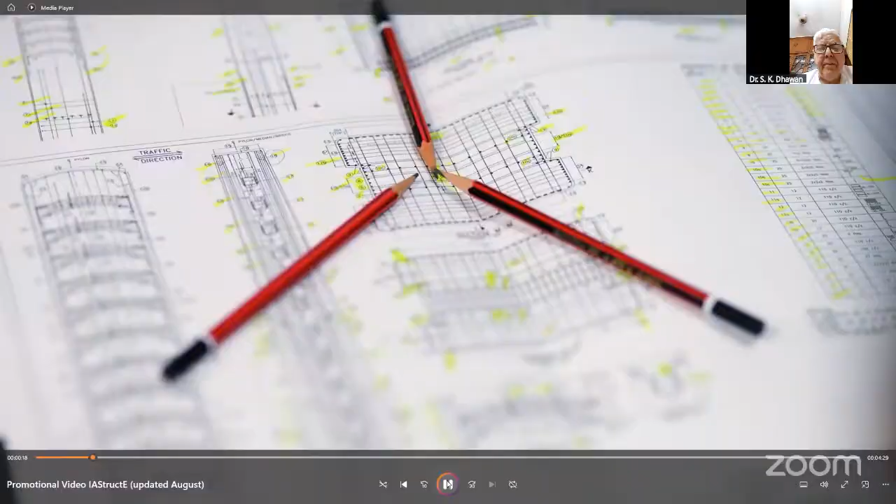The Indian Association of Structural Engineers, also known as IAStructE, was conceptualized and constituted in the year 2002 by a group of senior professional structural engineers from all over the country. IAStructE is registered under the Societies Registration Act 21 of 1860.

IAStructE is a national apex body of structural engineers in India with a mission to promote the structural engineering profession and cater to the professional needs of the structural fraternity. In the short span of 2 decades, the association has attained an eminent position in the professional field. Its membership is valued very highly in the profession.

Since inception, IAStructE has been led by eminent structural engineers like late Shri Mahendra Raj, late Shri Kumar Ghosh, Shri Subhash Chand Mehrotra, Professor Mahesh Tandon, Shri Alok Bhowmick, Shri Manoj Mittal and Professor R. Pradeep Kumar as its president.

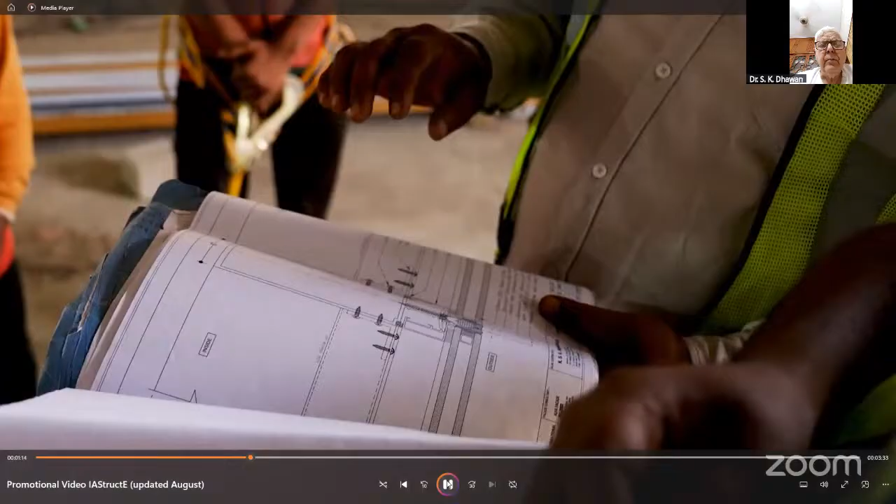IAStructE is a permanent member of Engineering Council of India and interacts with the government on professional and policy matters related to civil and structural engineers. To expand its reach, IAStructE has collaboration with various international like-minded professional associations and institutions.

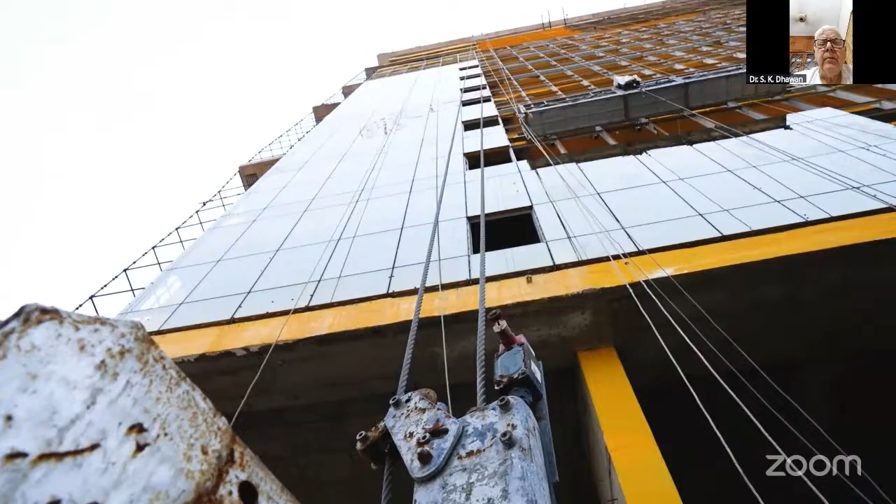IAStructE's prime objective is supporting and protecting the profession of structural engineering by upholding professional standards and acting as a mouthpiece for structural engineers in India. IAStructE endeavors to ensure that its members develop the necessary skill in structural engineering and work to the highest standards by maintaining a commitment to professional ethics and standards.

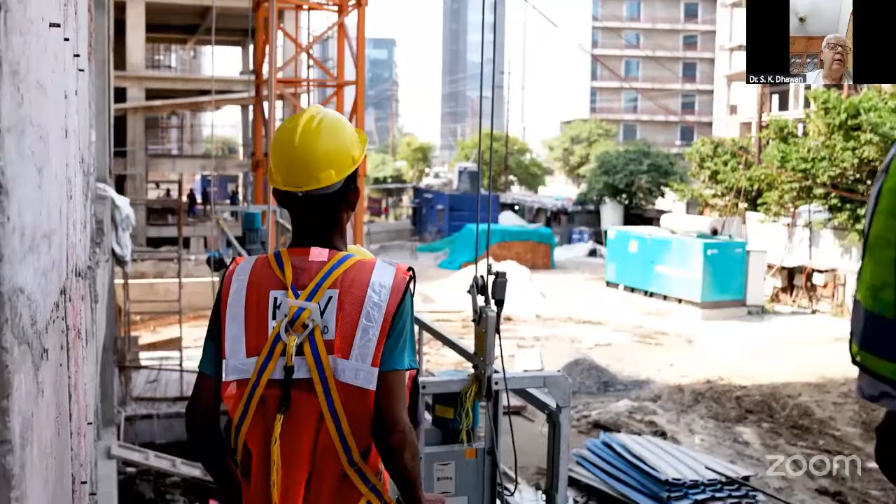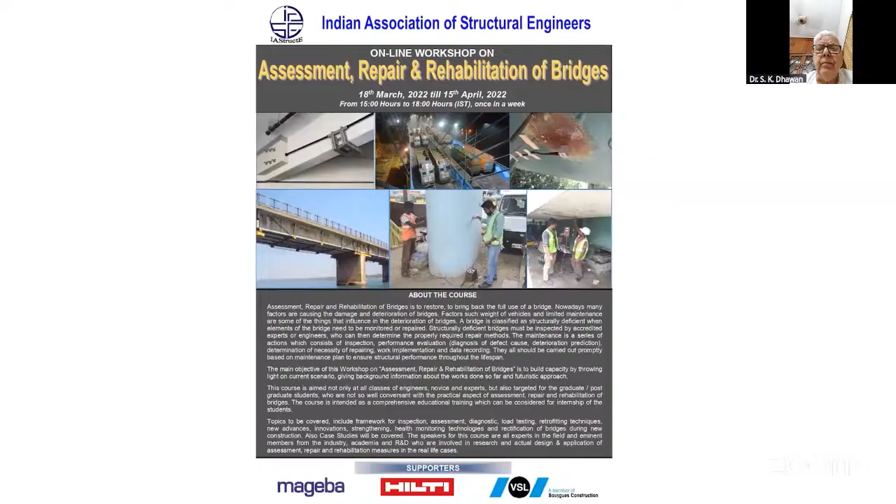IAStructE is actively engaged in organizing several continuing professional development (CPD) courses for structural engineers to help them update their knowledge and advance their career paths. It also conducts refresher courses for young and practicing engineers and student-oriented programs. Seminars, workshops, conferences, technical lectures and discussions related to the latest technological advancements, and case studies are also organized regularly for members to enable them to continuously update their knowledge and skill set by interacting with the best minds from the industry. IAStructE's activities are widely appreciated and known for quality technical contents.

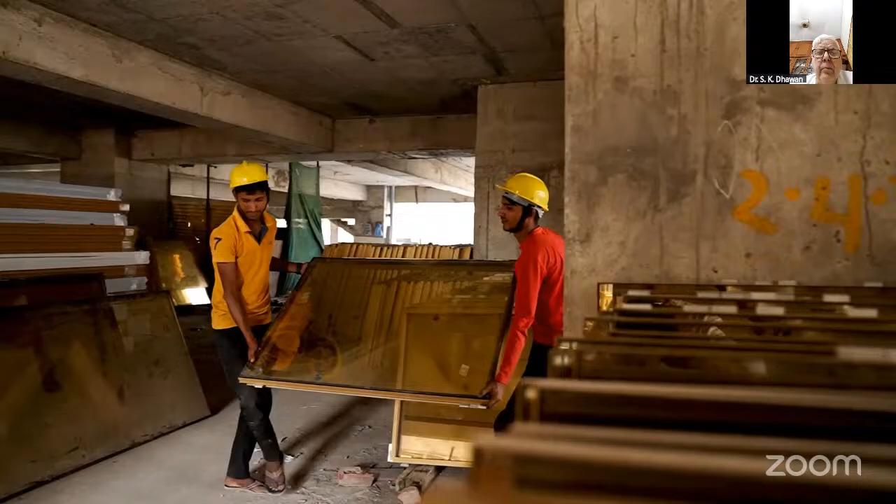IAStructE is also actively engaged in publishing its quarterly journal Structural Engineering Digest (SED), code commentaries, professional guidelines, and a monthly newsletter. IAStructE's publications are becoming popular with time. IAStructE has representation in various technical committees of BIS and IRC as well. Its members are actively contributing to national code formulations.

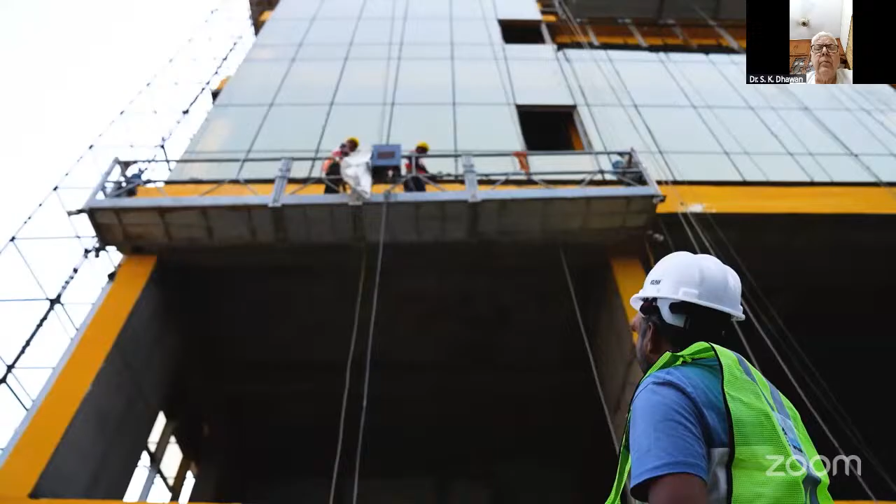In the year 2020, IAStructE started the National Awards competition to stimulate interest in the structural engineering field and to promote innovative thinking and creativity. The awards are presented to the winners in recognition of their outstanding contribution to structural engineering in the categories which include Outstanding Structure, Outstanding Structural Engineer, Outstanding Woman Structural Engineer, Promising Young Structural Engineer, and Best Master's Thesis in Structural Engineering.

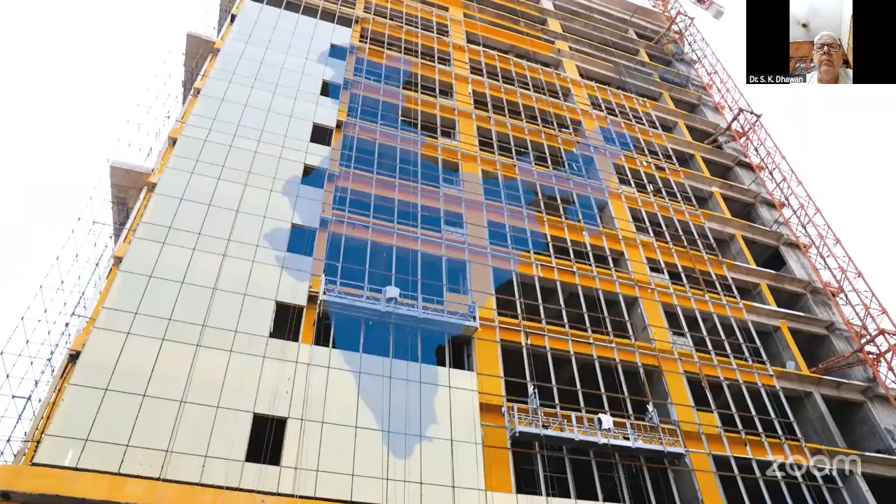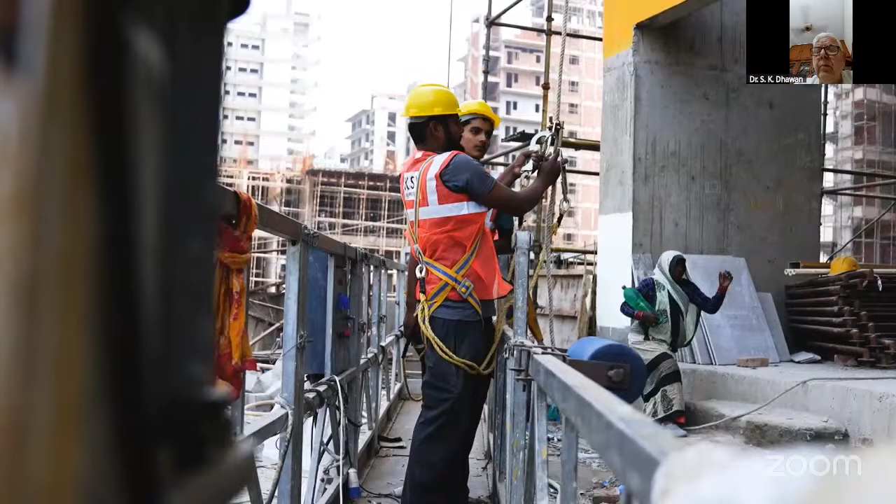IAStructE is currently operating from 4 regional centers, namely Eastern, Western, Northern, and Southern, having its headquarters in Delhi, to inculcate the professional culture and provide handholding to the budding engineers. IAStructE has its student chapters in several leading engineering institutions as well.

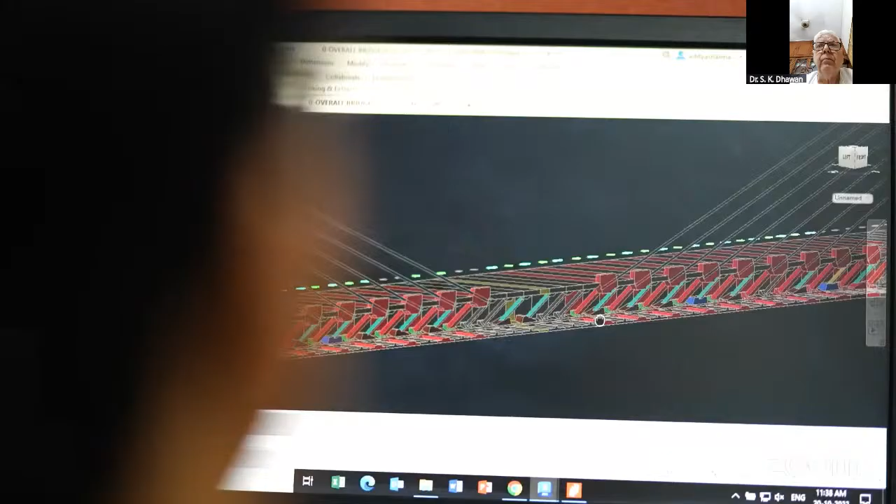Membership of IAStructE is open to all civil and structural engineers engaged in the structural engineering profession. Members are elected based on their qualifications and experience in different grades as per eligibility requirements prescribed in the bylaws. Each application is carefully scrutinized before electing the members.

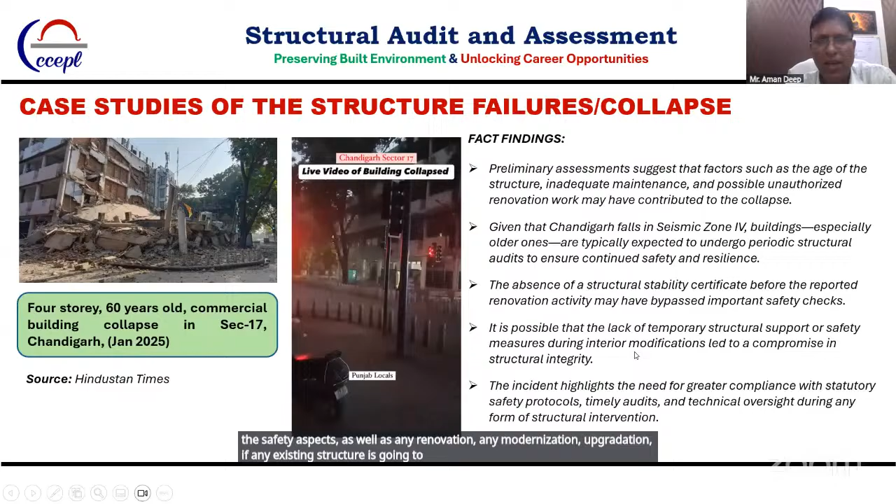So this incident highlights the need for greater compliance with statutory safety protocols, timely audits, and involvement of technical people who should be able to guide the safety aspects of any renovation, modernization, or upgradation. Any existing structure should be dealt with proper technical background. Another slide shows us the issues of neglect, or I would say technical neglect or technical incompetencies.

A 6-story building in Surat collapsed following heavy rains. 7 people killed and more than 15 injured. Similarly, another 18-story residential tower slab from 6th floor to 1st floor pancaked down, killing 2 residents in Gurgaon.

So many of such kind of news we are seeing for last many years. And the probable reason of this kind of collapse could be the corrosion of the reinforcement of the building, especially if I see the buildings which are having basements and stilts. Those areas are generally neglected for structural safety, and deterioration distresses start at the base level.

And from the base level, if the column reinforcement goes down, or maybe the concrete gets deteriorated, cracks, the structural capacity reduces a lot, and the earthquakes make them vulnerable for larger damages. So routine checks and audits were not there for these buildings, and unauthorized renovations carried out in lower floors. Cracks and water seepages had been reported earlier, but people ignored. Builder and RWA did not take any appropriate action.

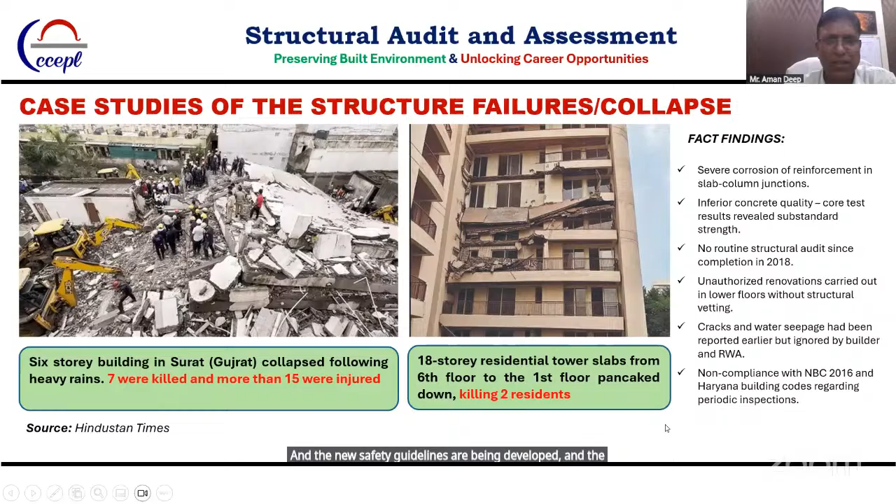So the key observation, what I find, is the aging infrastructure for these kind of accidents or deteriorations. Many accidents involve structures over 30 years old, highlighting the need of regular maintenance and audits. There are many unauthorized constructions which are non-engineered designs, constructed without any engineering involvement and not maintained. So those buildings are at severe risk.

The buildings what we sometimes call the general builder floors, they hardly involve technical people, and more focus is on the commercial gains. So for them, they say this is just a business, but for us, it is a profession. And as a profession, we have to see the building should be safe and should survive for its service life, the design service life. Now, what should be the design service life of a building?

Our general assumption is that for a very severe earthquake handling, we consider 50 years as a safe design life of a building. But if we see the infrastructure projects like metro railway stations and other important buildings, probably we want them to live more than 100 years. So for different types of building, we may have

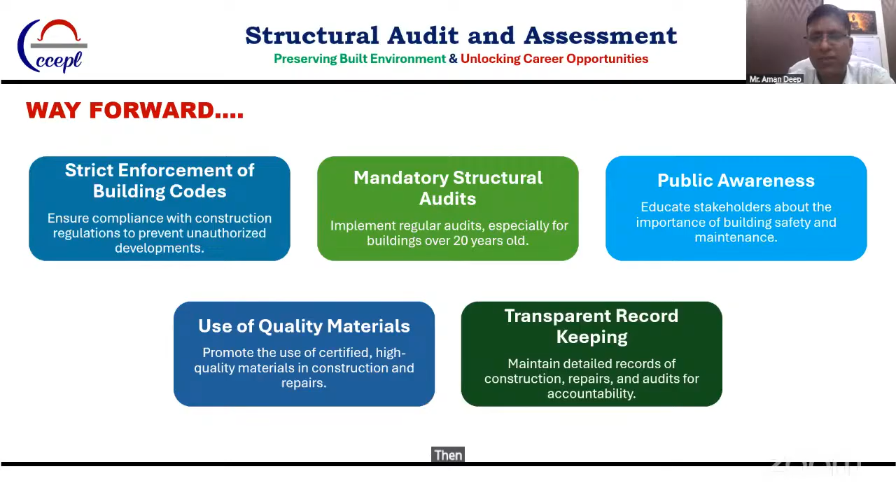errors also. And if, during our quality checks and quality control testing systems, we are able to get some information about errors or something which requires improvement, and if we are able to take corrective action and all required preventive actions, then our constructed built environment is going to be very good for the future.

So coming to the advantages or benefits of structural audits. Why are audits critical to the built environment? First of all, they give safety to the occupants. They prevent sudden failure or collapse. As in the initial slide I showed, some balconies collapsing, some handrails collapsing. These are the general news we see almost every week or so.

So if we conduct structural audits regularly, are concerned about the safety of the occupants, deal with the buildings with proper care, and are able to provide repairs and rehabilitation systems to the building properly, then the first advantage we get is the safety of the occupants. It will avoid any fatalities or injuries, and it ensures compliance with safety regulations.

Now, in some cases, the building's use type or loading type needs to be changed. Sometimes a residential building becomes a commercial building, or a commercial building becomes a storage area, so the load has increased. Sometimes a factory becomes a showroom, or a showroom becomes a factory. Sometimes a normal building becomes a library with a load of books, or some warehouses are created within the building.

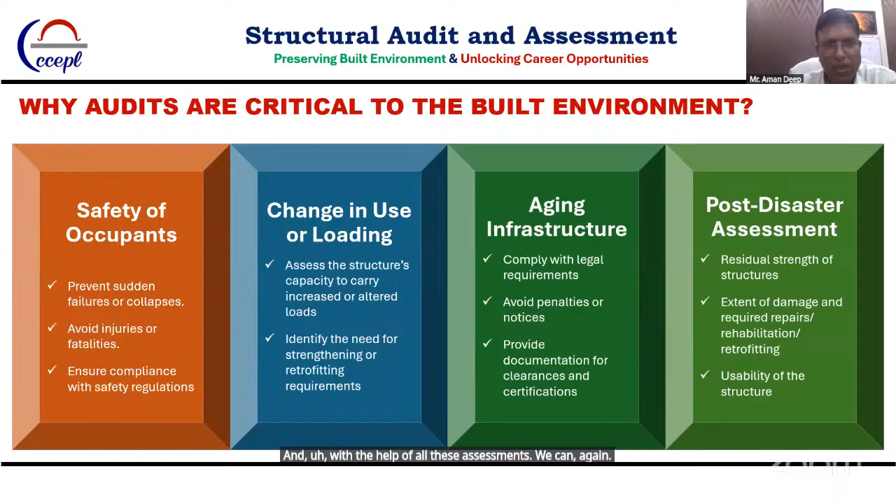And if some damages have happened, what is the need for strengthening or retrofitting those elements? With the help of all these assessments, we can make that building safe and habitable again, and it can have sufficient residual capacity to withstand another disaster.

Another advantage we get from structural audits is cost-effective maintenance. If we have timely audits every 3 to 5 years, we would know the requirement at that time, and with a small cost of repair, we can maintain the building on time. If we ignore the audits and safety repairs, after a long time the deterioration will be very high, and retrofitting or rehabilitating it could be very, very costly. So with regular audits, we can save a lot of cost during the building's service life.

Again, now coming to the advantage: regulatory compliance. As per our National Building Code of India, each and every building should have structural safety, fire safety, and electrical safety audits every 3 to 5 years. Different regulatory bodies define the structural audit requirements because it's a state matter. Ultimately, either the municipal corporation or authorities will define the period of audit and the compliances.

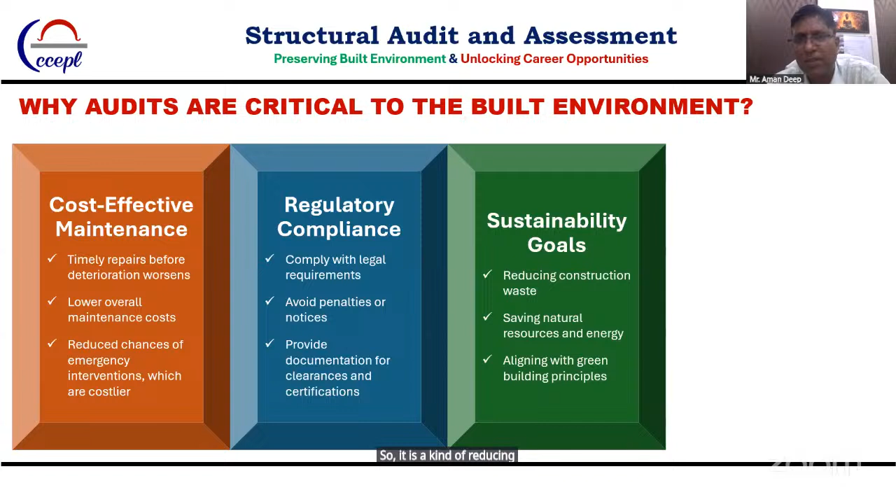And then sustainability goals. Now, if your building is going to live long, it is a sustainable aspect because constructing a new building consumes a lot of energy and causes CO2 emission. All building construction elements are consuming more and more carbon dioxide emission materials and energy. So if we are able to make our building life longer, it is helping us in our sustainability goals. It is reducing construction waste, saving natural resources and energy, aligning with the green building principles.

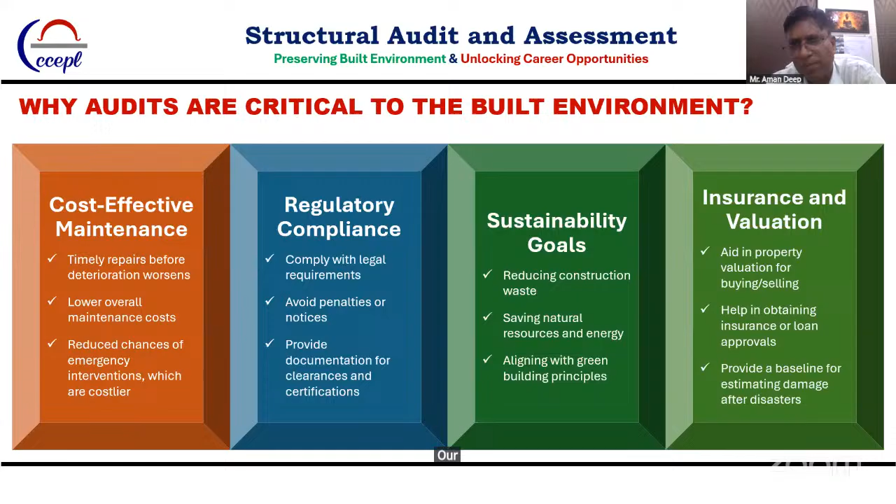And further, you get advantages for insurance and valuation. Though in our country at this moment our insurance premiums are constant, it is likely that in time to come, buildings which are constructed well and maintained well may have lesser premiums than buildings which are not maintained properly. So if we have regular technical audits, structural audits, safety audits, and we are complying with the safety requirements, our building insurance benefits and valuation benefits will be higher.

Until now we discussed the benefits of the structural audit. And now briefly, I will discuss how audits work, tools to tackle the hidden challenges, and the steps involved in structural safety audits. The first step is document review and critical visual inspection of the structure. Document review means the construction documents: as-built drawings, a geotechnical report if available, or documentation of any repairs, strengthening work, or interventions the building has undergone in the past. With critical visual inspection, we try to assess the condition of the building.

For things which are not visually auditable, we do non-destructive tests. There are many types of non-destructive tests which are helpful in assessing the building. There is a guideline document of IAStructE, available on their website. It is a small document giving a brief description of how to audit a building and what kind of non-destructive tests we require for the audit system. So you can get details from their document. At this moment, I'm just giving you the brief idea of the requirement.

What we sometimes find in the market is that some people only do visual inspection, and based on that, they provide a certification report that visually everything is fine, so the building is fine. So it is a very raw assessment if we declare based on visual inspection.

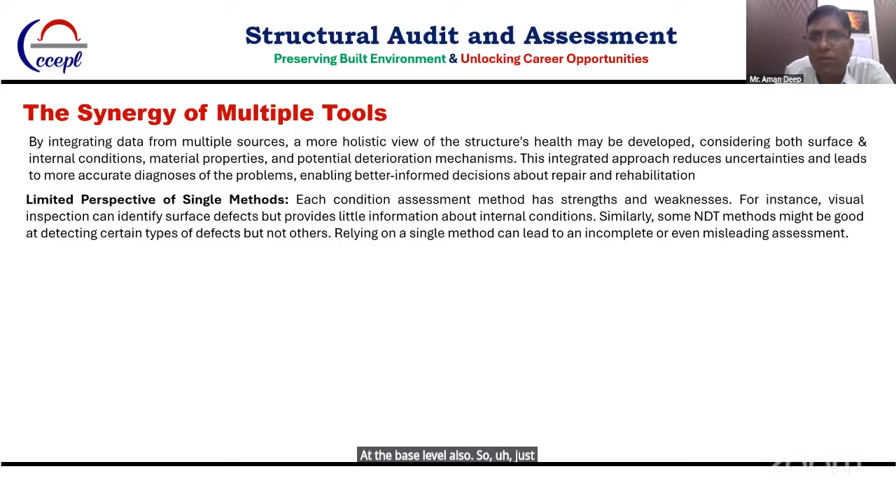Generally, it should be supported with a little more information about the internal conditions with the help of non-destructive tests or maybe some partially destructive tests. Sometimes we have to dig for the foundation sizing also, and sometimes we have to assess the condition of the concrete and reinforcement at the base level also. So just based on visual inspection, we should not certify any building to be safe.

Yes, of course, visual inspection is required to have an initial assessment, and then other tools like non-destructive and laboratory tests help for the complete condition assessment of the structure. So with this integrated approach, we take up the complete audit and assessment.

And I'm happy to tell that at BIS level, at the Bureau of Indian Standards, we are developing a standard for the engineers, for the structural engineering consultants, on how to take up the structural audit as a consultancy. The standard is at its advanced stage. Almost everything has been discussed. The document content is being finalized, and probably within this year, the Indian standard on structural audit would be available for all.

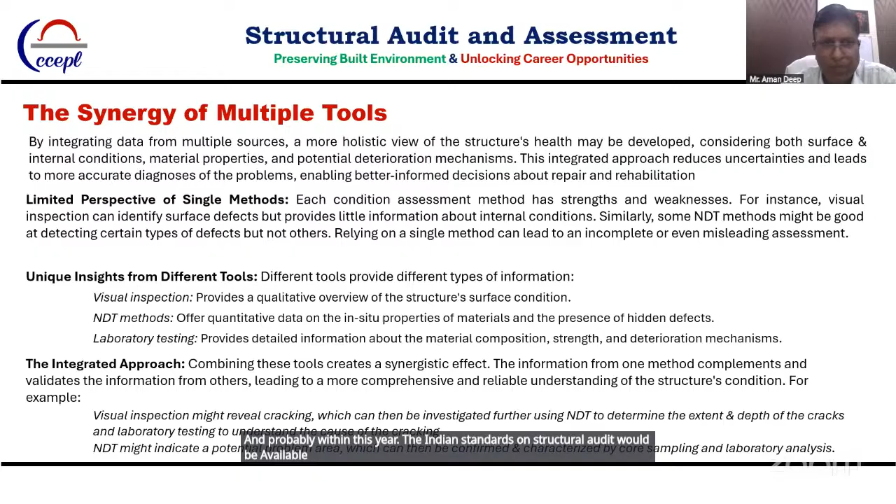So based on the current level of working at BIS and my own assessment, and as per our past experiences with the audit process of structures, we find there are different stages, generally 5 stages we consider of audit. The audit stages are mainly 2, but for the complete 360-degree completion of the audit process, I consider 5 stages.

First stage is the visual inspection by a competent structural auditor. Second stage is the non-destructive testing, maybe partially destructive testing also covered within this. And based on that, finalization of the audit report, which we consider to be a kind of condition assessment audit report. Now, if we have assessed the condition, if the condition is good, that is fine.

If the condition is not good, we go to stage 3, in which we require some strengthening intervention design. And all these designs will be taken up by a competent structural engineer, and it has to be vetted by the structural auditor who has the complete analysis of the condition assessment findings.

Stage 4 is the implementation of stage 3 by a competent execution agency. Now, in our country, there are many good execution agencies who have trained and developed themselves to work on the retrofitting, rehabilitation, and repairs of existing buildings.

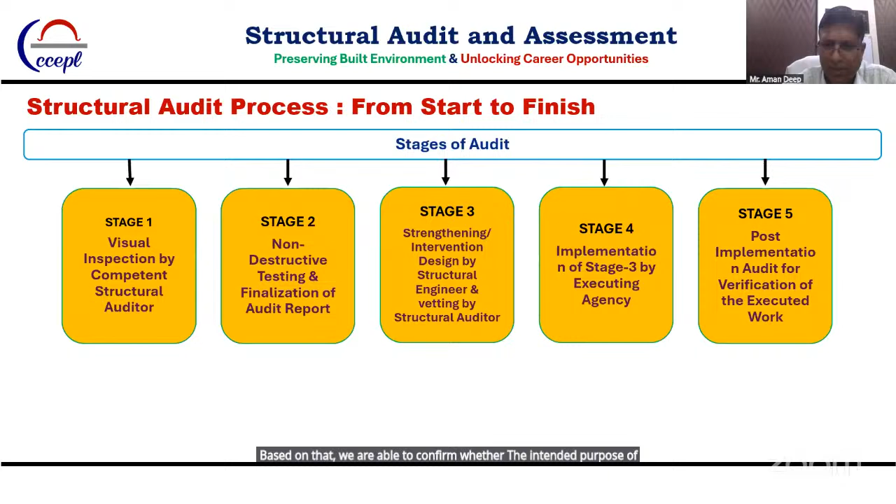Coming to the next slide, I would like to show you the basic framework of this Indian standard, which is under progress. I take the liberty to share the flow chart, which is in almost final stages. This flow chart shows how the structural audit process would take place from start to finish. Now, in this, we have defined 2 stages.

First stage is about the condition assessment, in which the aim and objective of the audit and the scope of work are to be defined. Then the owner will appoint a structural auditor. The structural auditor would carry out visual inspection of the structure, and based on the visual inspection, sometimes the auditor may do some basic non-destructive tests also at this stage, and then prepare and submit the visual inspection report.

If the aims and objective of the structural audit report is fulfilled, then this audit is considered to be completed. But if the building has some deteriorations and the building safety audit does not suggest it to be a safe building or structure, then we have to move to stage 2.

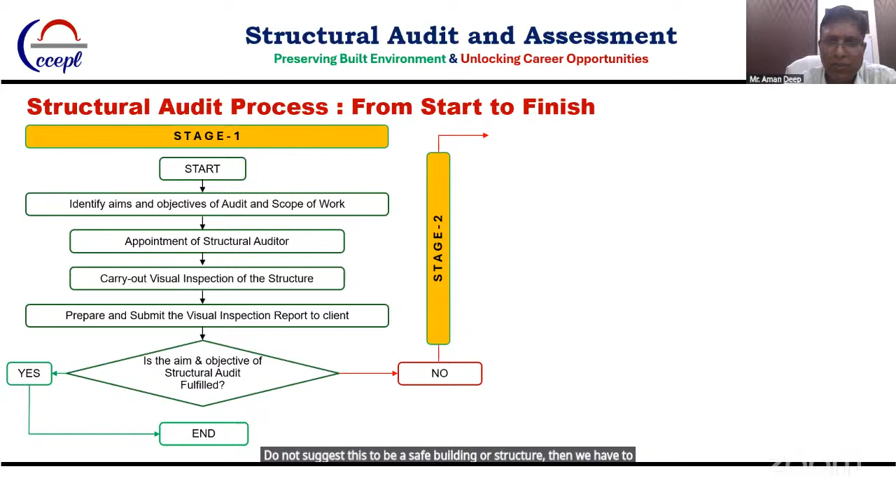And in this stage 2, we have to assess the damage, deterioration, and the evaluation of materials, construction material or construction quality, carry out non-destructive tests and other tests to assess condition of the existing materials, structural components by independent laboratory or by the structural auditor as decided by the owner.

The NDT test report should also include the following: the objective of the NDTs, the brief about the various tests performed, methodologies adopted for the test, analysis of data, derived conclusions, and recommendations based on the test. Preparation of test report by the testing agency and review and recommendation by the structural auditor.

Next step is estimation of demands and the capacities. Now, this is a very important point in this stage 2 audit. Once we have undertaken the testing and condition assessment aspect, we know the strength of the structural elements and other condition aspects. As per the latest standards, we have to analyze the building with applicable loads and forces and see what is the requirement of the structural elements.

Say for a column of say 600 mm by 600 if the building has, and if as per the analysis, the requirement of the reinforcement steel is say 2%, that is what we consider as a demand, that it has this much of bending moment and this much is the forces, actual force and other things. So that is the demand to be taken care of in terms of strength demands. And what is the available capacity has to be analyzed.

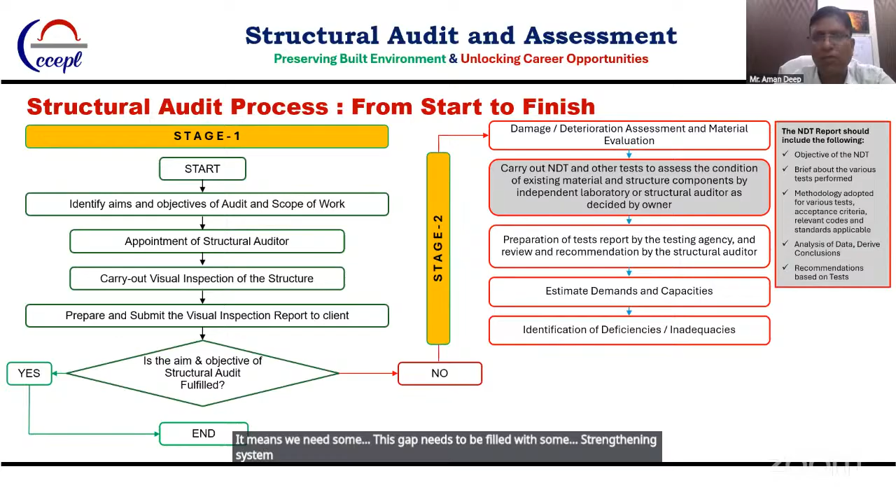Capacity is less, but our safety requirement demand is high. It means we need some strength. This gap needs to be filled with some strengthening system. Some intervention is required. So based on that, the deficiencies and inadequacies are identified.

And then based on that, the report is to be prepared by the auditor to guide the owner client that, based on the visual survey and other aspects, the building is safe or it requires some strengthening, local strengthening or global strengthening. Sometimes the building overall is fine, but a few structural elements are deteriorated because of maybe some higher moisture content or maybe some other attack of the environment.

So if it is a local issue, then we can just repair those local structural elements and then certify the building. And if the building overall has a lot of issues almost everywhere, then it is a global issue and it has to be dealt with a proper system of complete rehabilitation or retrofitting intervention. And then the audit part is generally considered to be closed as stage 2. And then the work of the execution agency comes into picture. So selection of the competent retrofitting execution agency or retrofitting contractor comes into the picture.

And before that, because in this part 2, only we know what is the gap, the demand capacity gap or the deficiencies, a competent structural consultant has to design the remediation. If remediation is covered within part 2 of the audit, then it is fine. But if in part 2 of the audit it is only the recommendation that the building needs some remediation, but the design of remediation is not covered, then remediation design will come into part 3, and execution by the competent retrofitting contractor will be stage 4. And then, as I discussed earlier, verification or validation of the intervention comes at stage 5.

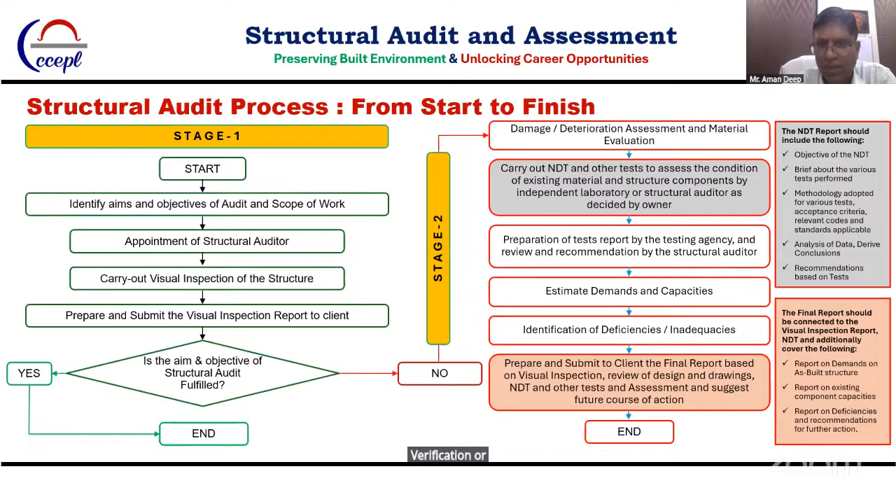Now, after all these discussions, we know the importance of the structural audit. We know briefly about the process or steps involved in the structural audit. Now coming to the career opportunities we have. I am very sorry to say that in our country, we have very, very few competent structural auditors.

At this moment, what we find in the market is if any building is under distress, people do not know whom to approach. The owners are confused. Sometimes the delay of intervention is because they do not find competent professionals to deal with the situation, and things linger on. Sometimes people approach professional architects.

Now, the architects are not trained for retrofitting design or structural audits. The architects are trained to design new buildings. But if they see existing buildings, in their eyes they are only to be repaired, so generally buildings get some basic repairs, whereas probably the building was requiring structural strengthening and retrofitting measures.

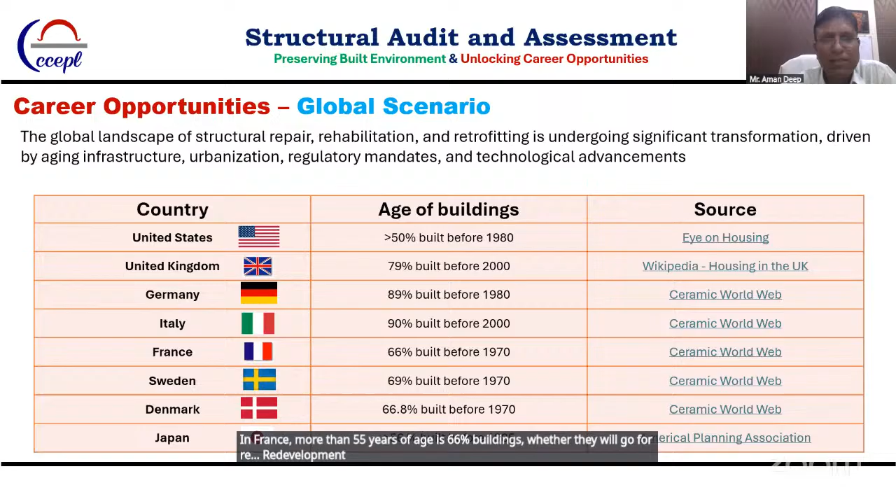In Germany, it is 89% which is more than 45 years of age. In Italy, it is 90% which is 25 years of age. In France, 66% of buildings are more than 55 years of age, whether they will go for redevelopment or preservation. So these are some statistics which we have collected.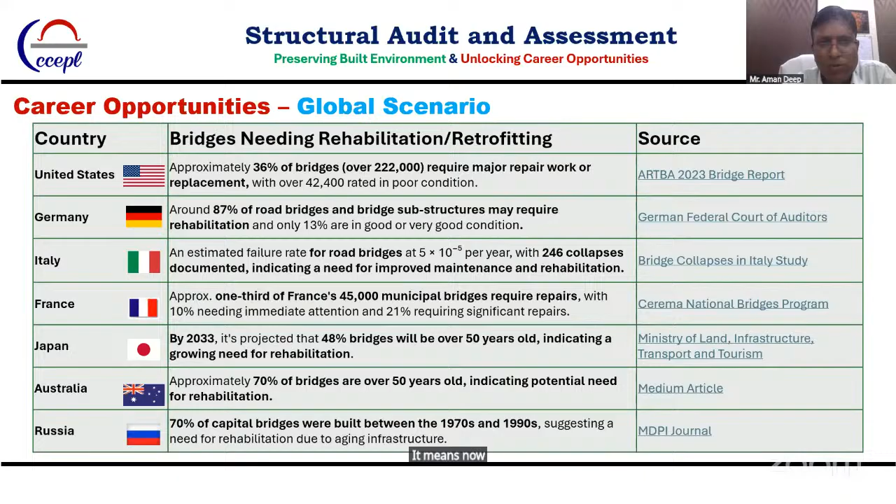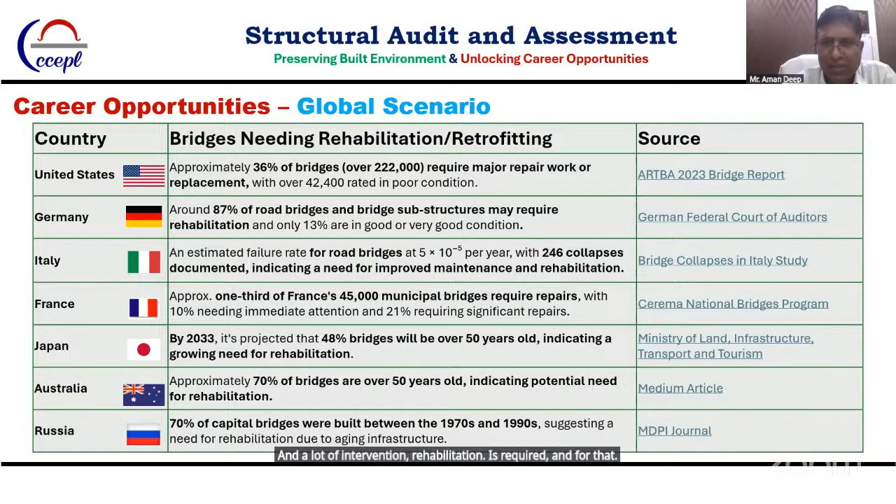So if we consider a general structure life of 50 to 100 years, and the structure has already lived 30, 40, 50 years, it means now is the time to elevate the capacities of those structures to meet current requirements. A lot of intervention and rehabilitation is required, and for that structural audits are required. Some countries have taken appropriate actions for that.

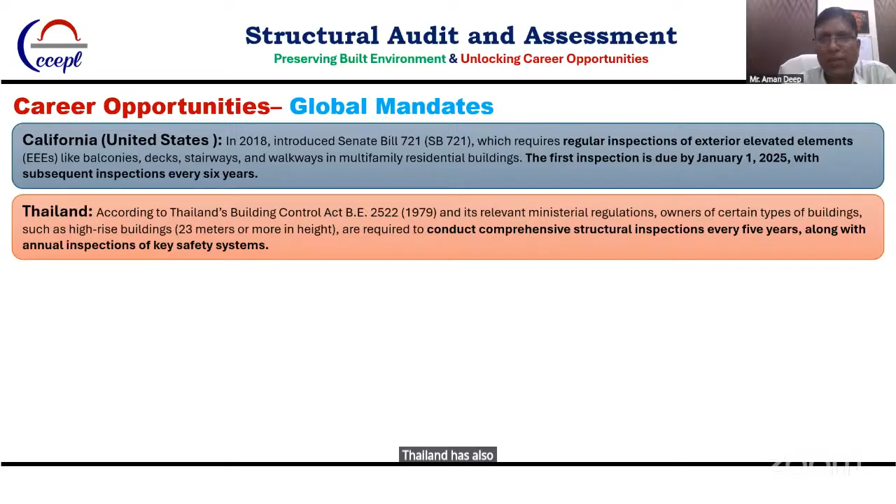In the United States, they have mandated that the first inspection is due by January 2025, with subsequent inspections every 6 years. So important decisions are being taken all over the world. Thailand has also mandated structural audits every 5 years, along with annual inspections of key safety systems. In Singapore also, structural audits every 5 years.

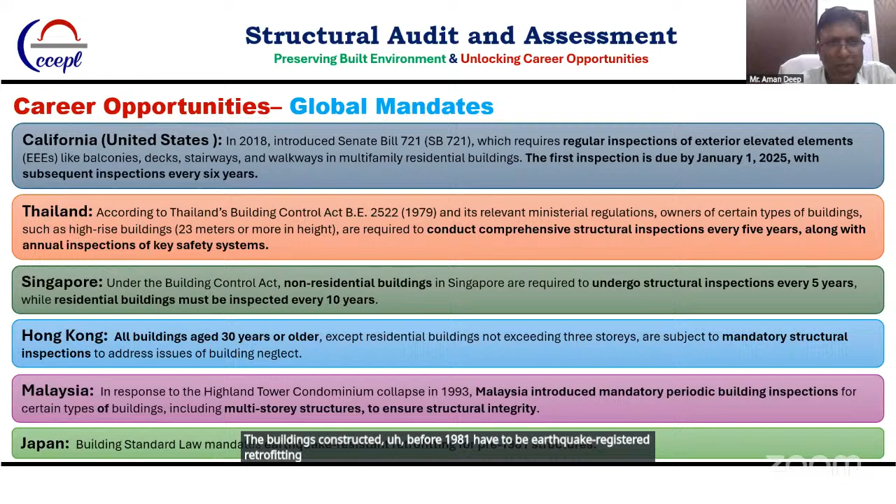In our country, we see a lot of accidents happening now. I do not want to read about all these accidents, all these collapses, but I must tell you that there is a grave need in India for saving our existing built environment. We need competent structural auditors, structural consultants who can assess the building, who can do the condition audit, and then the required buildings should be taken up for the required intervention or strengthening.

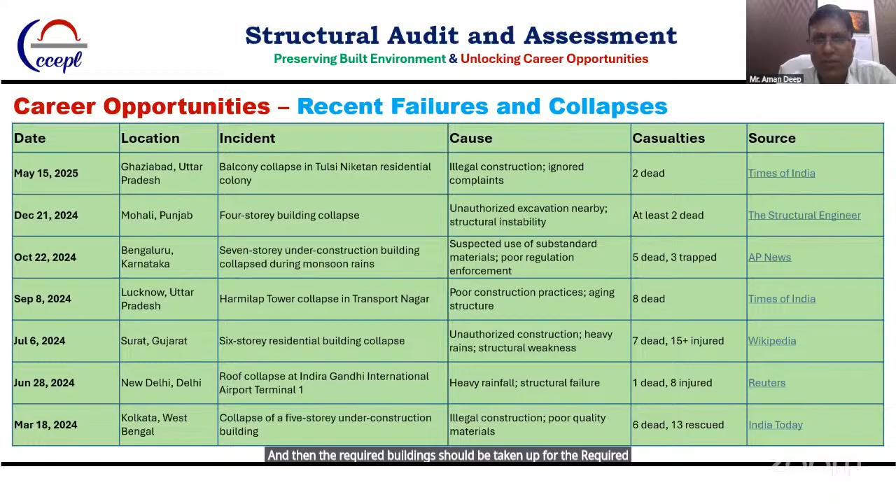So some authorities have already taken some decisions. In Delhi, zones have been divided. MCD has already notified that buildings constructed before 2002 have to undergo structural audits and should meet the safety requirements. In Mumbai, structural audits are being planned for more than 1,000 buildings, and approx 13,000 buildings to be evaluated overall in Mumbai.

In Navi Mumbai, 527 buildings were identified as hazardous under Section 264, and these all need to be audited, and the safety of these 527 buildings has to be ensured. Even in Noida and Ghaziabad, more than 100 buildings were found to be unsafe in Noida itself, as per the survey of 2018. In Ghaziabad, 102 buildings were declared unsafe in 2020.

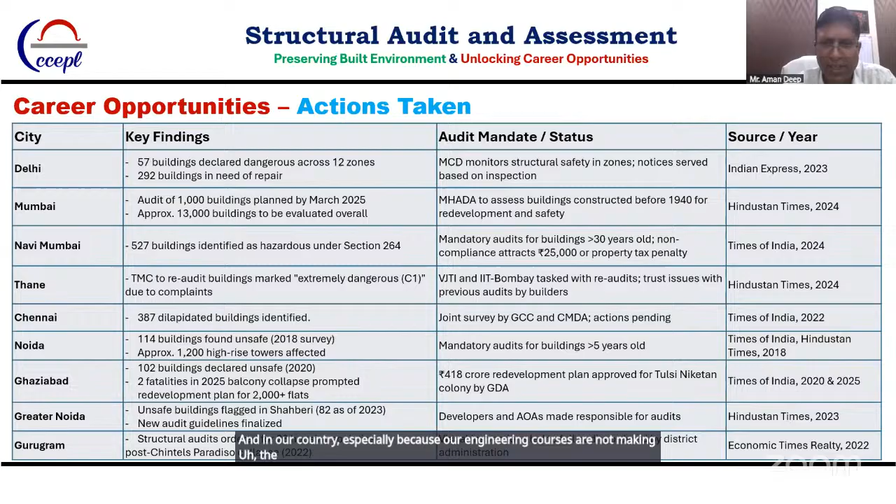The structural auditors are required, and in our country especially, because our engineering courses are not creating awareness about existing buildings and structural audit systems. So there is a continuous need of training to become a structural auditor. We in our organization have taken one initiative. In this initiative, we have decided to train structural engineers to become good structural auditors.

Within this process, we have launched one training course, which is completing next week. It was a 12-week course, and more than 25 participants registered, and they are going to be completing their course next week. So they would be becoming structural auditors with complete technical know-how. In these 12 modules, we taught them about the introduction of audit, identifying the structural challenges.

There are different types of distresses, how to identify those distresses, what type of issues make building distresses complex, like under what circumstances corrosion takes place, cracks, what is the need of waterproofing in certain areas, dampness and leakages, how to deal with these kinds of issues. This was in a hybrid mode, every Saturday, a full day course. So it was a kind of 12-day full day course for structural engineers to become skilled structural auditors.